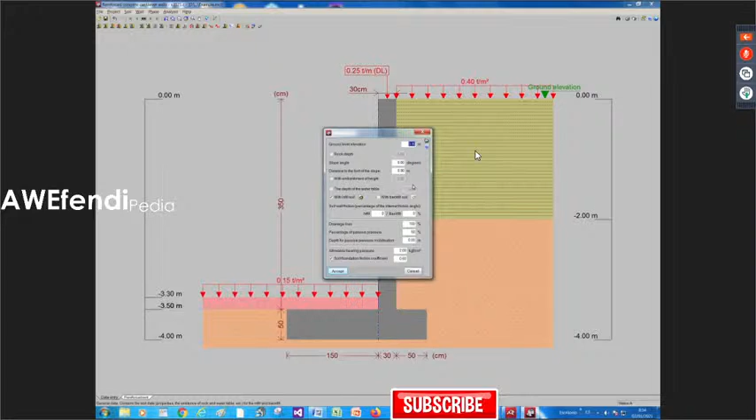Well, the type will permit us to change if we want fixed. Fixed means that we don't want to know anything about the foundation. We can choose strip footing, which is normally the option we use, or the capping beam to have the pile cap distributed with two parallel pile alignments. So we leave this default option, and the next thing to do is to go to the soil and fix the general data. We'll see it in the next job. I'm just making a general introduction of the program.

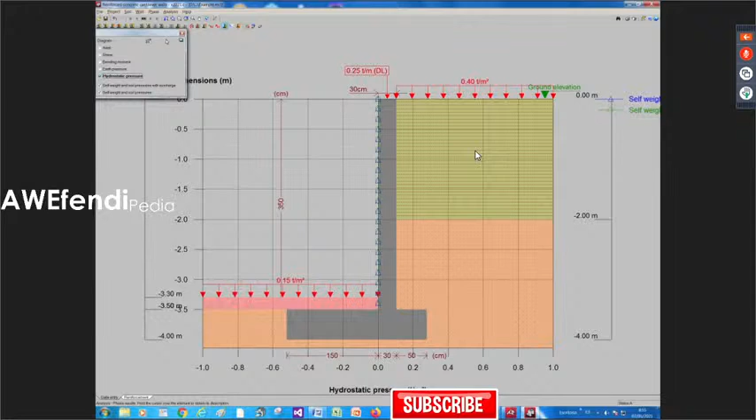And when we fix the soil, we can also edit different layers to fix parameters of the layers we have. We can go to the wall and edit the geometry, the thickness, the bottom thickness to make it variable. And we can create different phases where we change the way the soil acts. When this information is done, we can go directly to analyze and force the program to give us some results, like axial diagram, shear diagram, bending moment, earth pressure, hydrostatic, and we can see it in the windows.

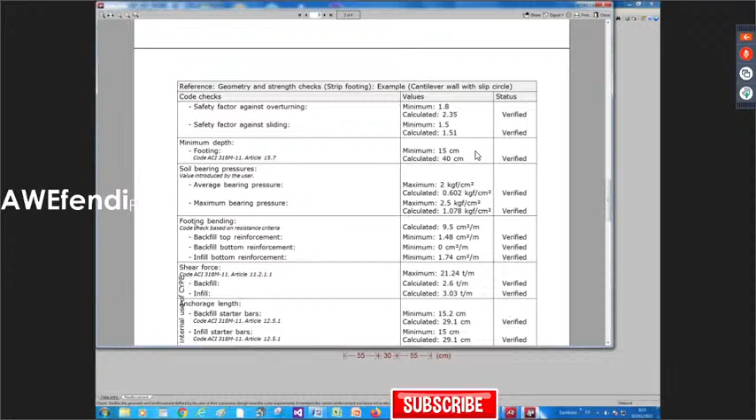But normally people go directly to design all. Design all means that the program will make the design of the reinforcement and also of the footing we need. When this is done, we have the possibility to make checks for the element, which will permit us to see the different verifications made. Basically, we have in the wall all these checks, but we have also in the footing the verification of slipping, of footing bending. We have the safety factor against overturning, sliding. This is very important for this type of wall, to know whether we have safety or not.

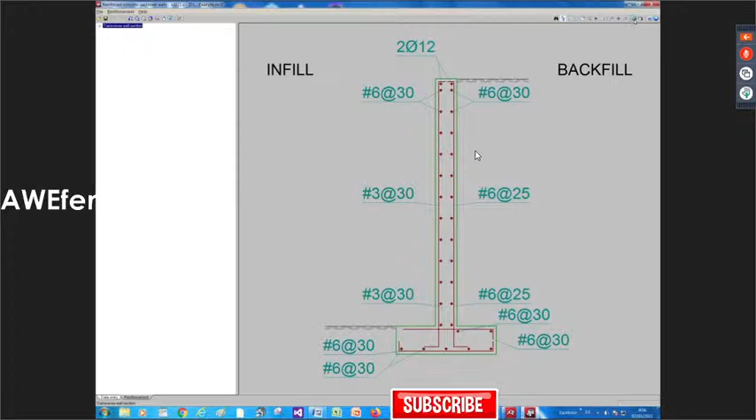So when the program gives the geometrical solution, we can go to the reinforcement and see the different reinforcement which was fixed. We have the possibility also to make additions, change the geometry and spacing, and verify the reinforcement fixed by the program. So this is a general introduction. Like other CYPE programs, we have the possibility to make general output for all the chapters we choose, and the output will be exported to the standard formats. In the plan creation, we also have the possibility to let the program generate drawings.

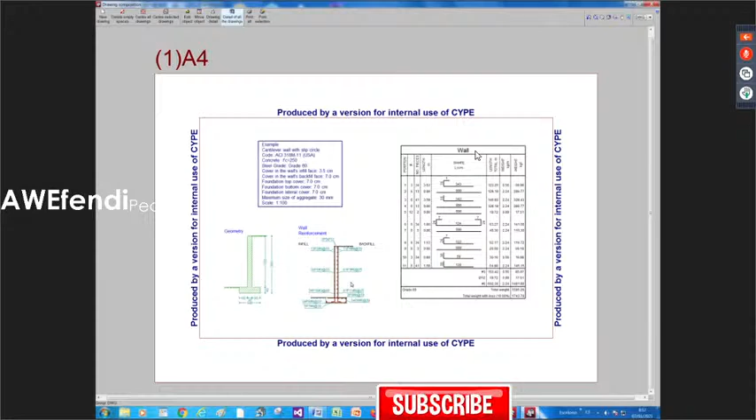So this is the drawing which was generated with a table showing the different types of reinforcement the program generated, and the way to cut the bar.

With this introduction, let me start a new job so we can go into more detail with the information of the case. So very simple: we have a data entry, a reinforcement. It's a simple cantilever wall where we'll have the possibility to change variables of the geometry of the wall.

The foundation will have the parameters of the soils, and also we can go to the project. We have the possibility to change the material we use, and the options the program uses to make the verification, like the safety factor of sliding and overturning. We can adapt the special case we want to make. This is some option to permit the program to take different ways of making the reinforcement, without continuity in bar spacing.

Let's start a new job.

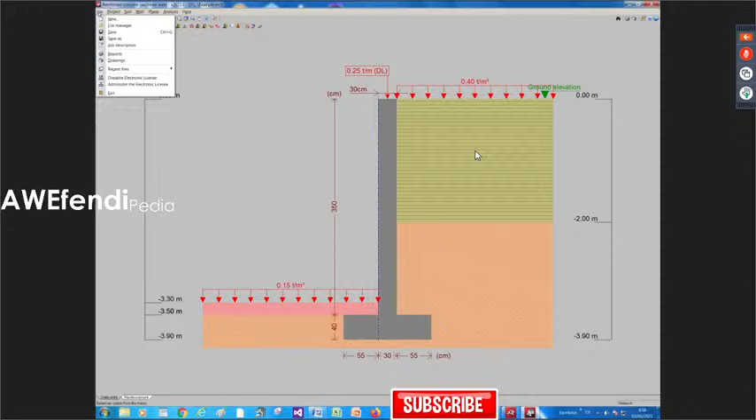Normally we can start from zero, or we can use the assistant. If we are starting for the first time, I recommend you use this option. It will permit you to have more aid while putting in information. So we have this assistant, which is very simple.

You see that we can control the geometry, the soil, and the load. When starting with the geometry, we have to fix information like the height. We want to resolve the problem we have in mind, so we can leave this value or we can change it. No problem, that depends on you.

You can, if the wall is high, maybe you want to optimize the section and make it variable, and you can choose this different option.

The footing we will handle with tools and helps. We'll put this option, so we have tools and help in the footing of the foundation we are making.

So we go to the next item, which is the soil, and we can choose in the backfill one of the proposals the program gives us. When we choose the type, it can be gravel, but no problem - if you have specific geotechnical information, you can choose. You can choose in these windows something similar, and later you can change parameters.

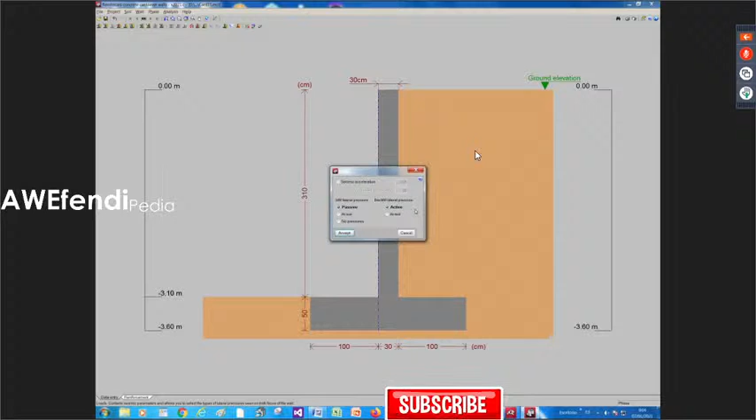In the case we have some type of element to avoid the movement of the upper part of the wall, we change it to at rest. For the infill lateral pressure on this side and the left side, to prevent the sliding of the wall, we use passive pressure.

So normally the default option is the correct value to choose. If we have seismic forces, we can permit the program to use the Mononobe-Okabe equation to generate these forces, taking into account the acceleration we input and the percentage of this.

We have an error at this point in the live load. This word is not correct - it should be surcharge, not live load. Live load is considered with seismic.

We will use 18% of the charge to generate the horizontal seismic force. But I have to note this word, so the team will make a correction in the English version.

We also have in the reinforcement table the possibility to see the types of reinforcement available, and the program will use it to make the design. If we want to add another combination, we can do it, but I think this is enough for the typical job we are doing.

With this option, normally we don't need to come back to this in any job. When we know what the program does, it's sufficient. There is some message - no, this is okay, so we go next to the next menu.

We go to soil. In the general data, we can see some parameters. The ground level elevation we already talked about in the general windows - we will not change it because we want the top part of the wall to match the top part of the ground.

We can, in case we want to release the pressure, if we have rock at some depth, indicate at what height we have it. This is not often the case, and we can have rock like this, but this is not common. So let's go back to general data, so we can decrease the pressure according to the real situation we have in the job.

So we have the slope angle, we can have a sloped angle in degrees, and we have a distance of 1 meter - you see what we change. This will permit us in some cases to make an accurate definition of the soil. So we remove it to 0.

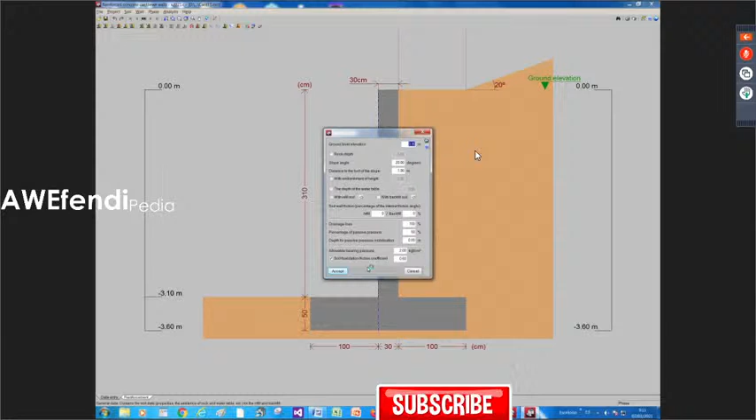This the engineer decides. We also have the possibility to change the allowable bearing pressure if we don't agree with this value or want to change it. And if we want to make the verification of sliding, this button must be checked. You see that the program helps us and gives aid in any window, so we can know how this parameter can affect the calculation we make. This is very important. We also have general aid at this point. If we click this button, we can get special aid on all the parameters we need, so this is the way the user can have specific information about the parameter being changed.

So let's come back here, but I want to go to the soil general data. I want to remove this value. So I accept, okay. When we go to the soil, we have the possibility to create a new layer or edit a layer which is already in place.

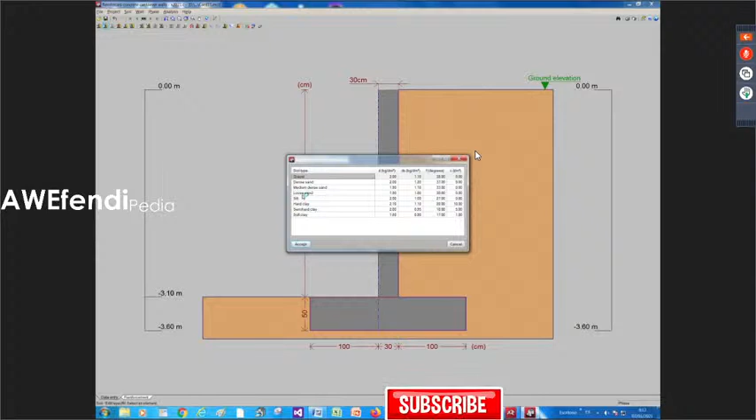You remember at the start, when we use the assistant program, it forces us to use some generic type of soil. But if we have a specific soil, maybe we want to change the submerged unit weight, or the internal frictional angle, or make it different. This parameter is very important to generate the pressure. Even though the program gives us some standard value, it's very important to input the value we have in the geotechnical report.

That's why when we go to soil edit layer, we can fix the parameters properly. If instead of 30 we have 22, we have to input that value. If we have some cohesion, we have to introduce it to help us; if we don't have cohesion, we don't put it, of course. So we see that it will all work perfectly. We also have parameters to copy a layer, edit a layer, or change the hatching, but this is simply for changing the way the soil is hatched, which is relatively unimportant.

We can go to the phases to change something during the life of the wall. Maybe we have some variable forces, so we can make the load incremental. We can add a vertical load at the top. Maybe we have 1 ton in the dead load, and we put some value in the live load. I'll remove it and put vertical load as 2 tons, with no increased load. This will be sufficient. You see the program will show this load in the window.

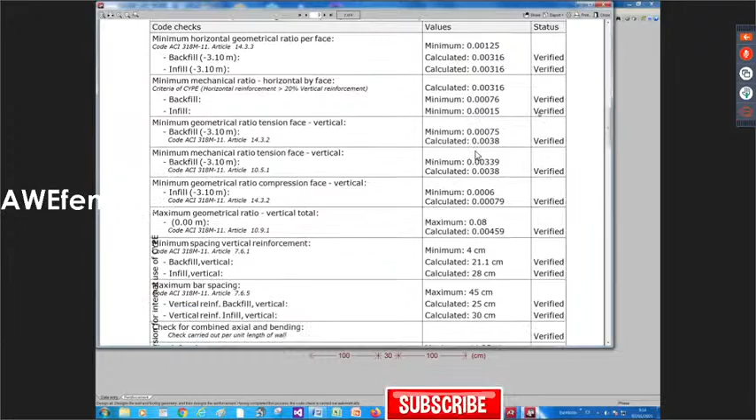So now we go to the analysis. We already see and force the design of the wall. Let's see some checks. We go down to the point of verification to see what it shows.

According to the code, we need to have a cover which is a minimum of 7.5 centimeters to verify. So the way to verify this is if we come back to the project and go to the material and change the minimum value.

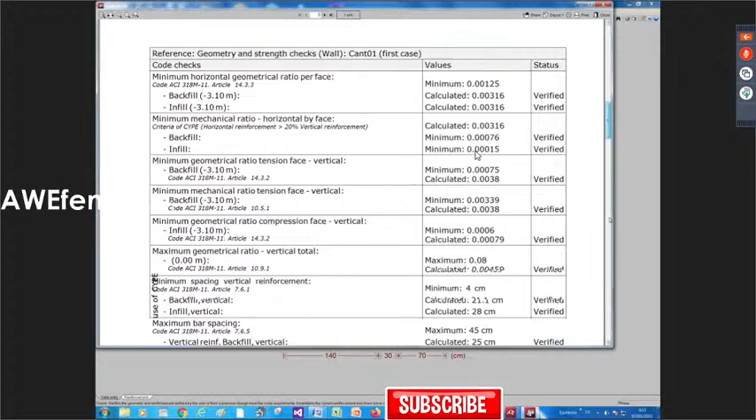Let's see what happened. The cover of the lateral—what I'm talking about is the lateral cover of the footing. Project, material, lateral—this is my mistake.

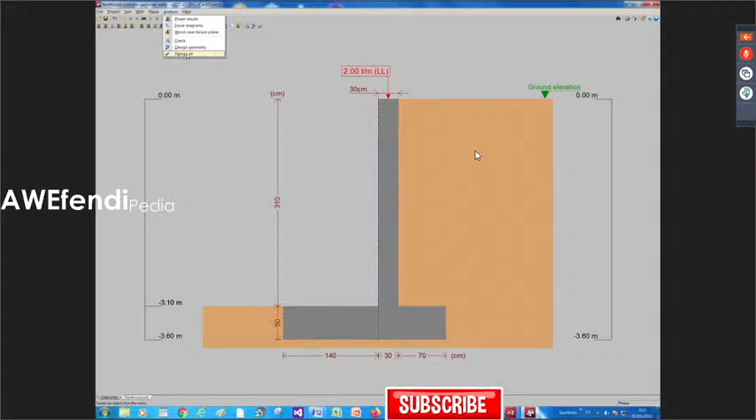If we want to verify it, or if we take a different decision as the engineer, we can go on with it. I make the changes and immediately the program takes it into account and verifies the condition. So, well, this is the solution.

If we need to change some geometry, we can do it with edit-span foundation. We go and change the geometry—if this is 140, we change it to 135, like this. The program accepts this modification, and we can force the program to design the geometry. So the program, without changing the geometry, tries to design it and give the reinforcement according to the new values. If we have some problem of overturning or sliding, the program will advise us.

So let's check—we see that this solution is correct. So the next step is to go to the reinforcement to check if we agree with it. Some people need this reinforcement to continue like this, but in this case it's not necessary. So if we want to force the program to do it, let's go and change the footing.

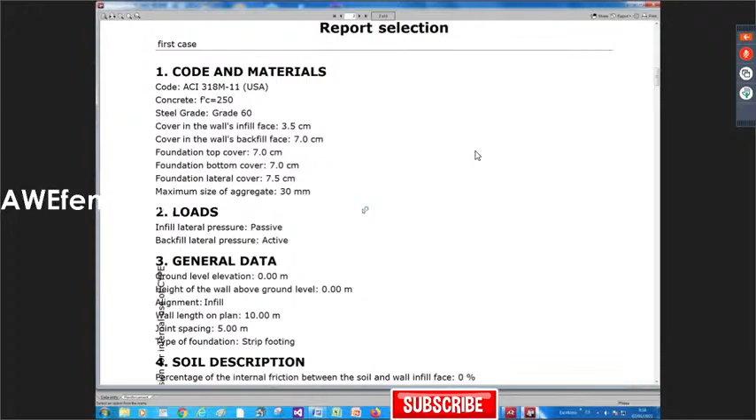And now we can finish by making, of course, the report. It will show us the case selected, the load input, the general data, the soil description, the geometry, and the phase diagram. We consider numerical values of axial, shear, bending, earth pressure, hydrostatic. In this case, we don't have it.

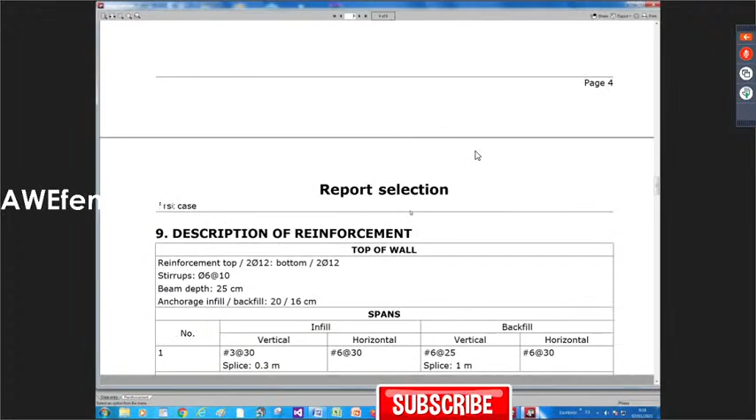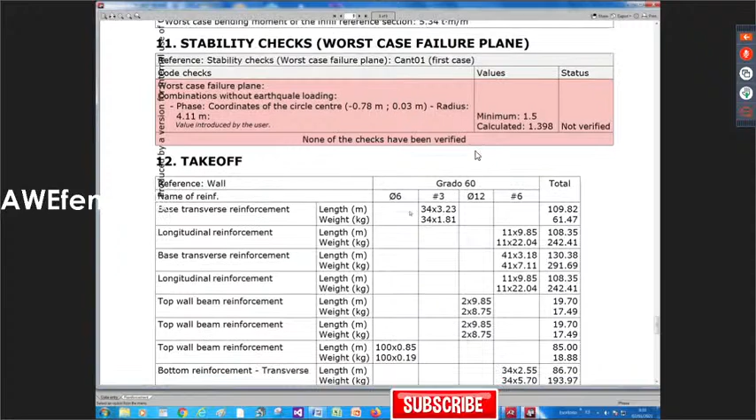That's why the combination makes the design report selection, description of reinforcement according to the different element report. The checks made for the two elements, the vertical element and the foundation element. And this is the stability check, which is a bonus the program gives us.

In this case, if I come back to this point, I choose analyze and we choose worst case failure plane. It is an additional verification the program gives us. You see, the program in this case tries to analyze choosing the center and a curve for the slicing, and this is the poorest point. This point gives us a coefficient of security of 1.4, which is less than 1.5. That means that it doesn't work.

Normally, this is a theoretical computation. So maybe you can say that this wall doesn't work like this, because we don't have the factor of security higher than 1.5. How can we arrange that? We have to think that the ground is not homogeneous. It's irregular. If we have some stone there, this factor will be higher.

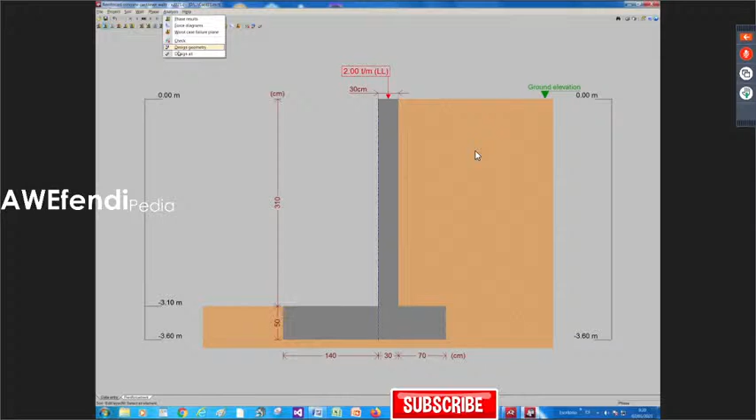Or we can also try, normally we don't take into account the cohesion in the soil. In reality, we maybe have some cohesion to permit us to pass this verification. Let's try to put 1 ton. And we go back to analysis, worst check. See, with only that change, we increase the factor to 2.36. That means that it works.

So take care about this verification because it's a theoretical value. That's why the program makes it separately. It doesn't make it with the general check, it makes it apart, so the engineer can understand and take a correct decision to verify it.

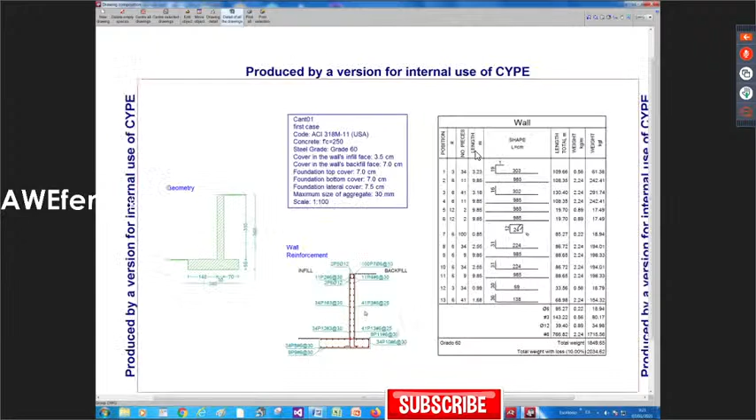So, to continue, we force the creation of the plan and add, of course, the reinforcement. We can add the title bar. So we see the geometry at this point, the reinforcement at this point, the table for the measurement at this point. That's all for this program.

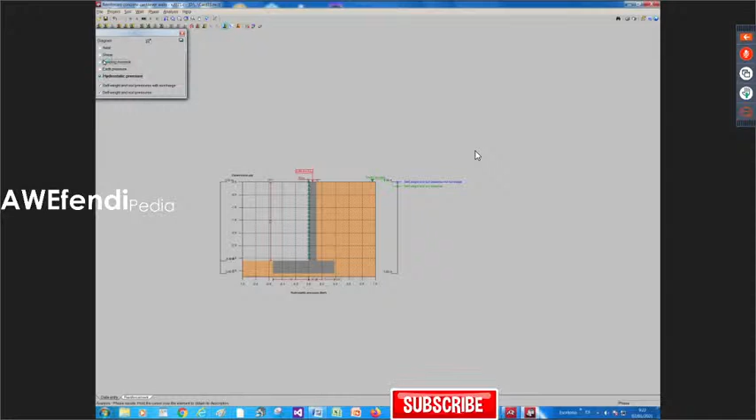How do you make the soil layers? Yes, can you repeat? How do you make the soil layers if you have 2 or 3 layers of soil? Yes. Let's come back. See, you just go to soil, new layer. You give a name, second layer. When the name is given, you give the depth, 1 meter, and change the parameters. You have the second layer.

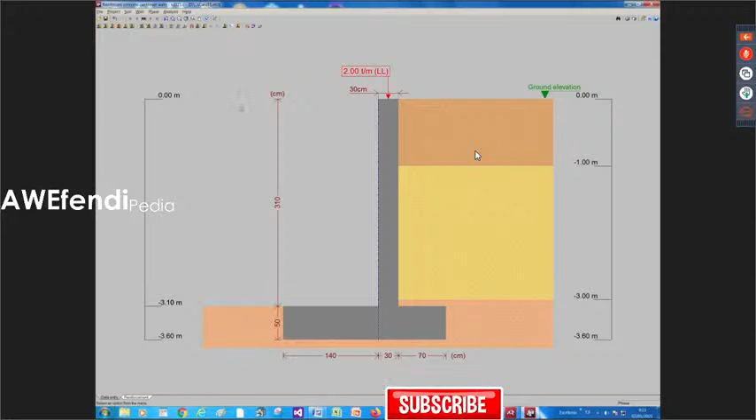If you want another soil new layer, in this case third layer, depth 3 meters, and so on. You can create all the different layers you want. This is not a problem. Normally within 3 meters it is difficult to have changes of soil.

Just now you showed the reinforcement, right? In the reinforcement, it says number 3. What is the diameter of the steel? How do we see the diameter of the steel? In the reinforcement, at this point? This is the number 3. What does it mean? This is because I chose the ASTM representation.

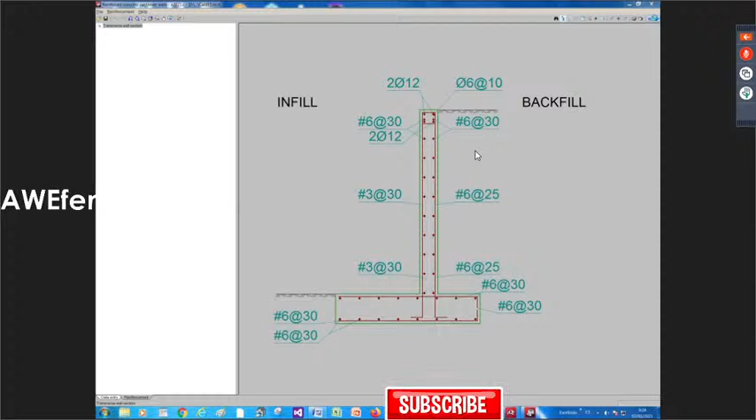If we choose a different representation, this goes according to the ASTM unit representation of reinforcement. Let's go back to this. Normally, what we use over here is like D16, which means diameter 16. Yes, because it goes. Let's see this.

I have in CYPE, because now we are working in house, the equivalent of this diameter. But normally I don't work with this type of design. So you want to see it like that, no? Because it depends. Does that mean like 10 millimeter at 25 centimeter distance? Is that right? Yeah, this is the displacement and the diameter.

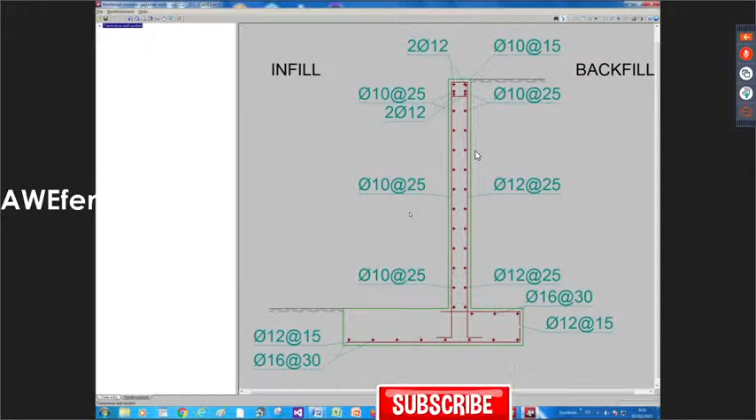And when we change the ACI, we have English nomenclature of diameter. If we have the equivalent table, we can choose it. Normally, when we use this code, we also manage with people who know how to use this type of nomenclature. This is the way we think it. Okay. Well, in this case, we close this.

And we go to the Box Culvert. The Box Culvert is a specific program which permits us to, let's see, it's a program which is prepared to make analysis of structures of small bridges, concrete bridges with a span normally no more than 12 meters, 30 meters, beyond which we will need another technology of pre-stress. So it's very important to understand which type of element we'll manage.

So before I start to show the program, I will give you a general view. Let me show you some images I prepared. This one. Even though this is in French, no problem. So this is a general way.

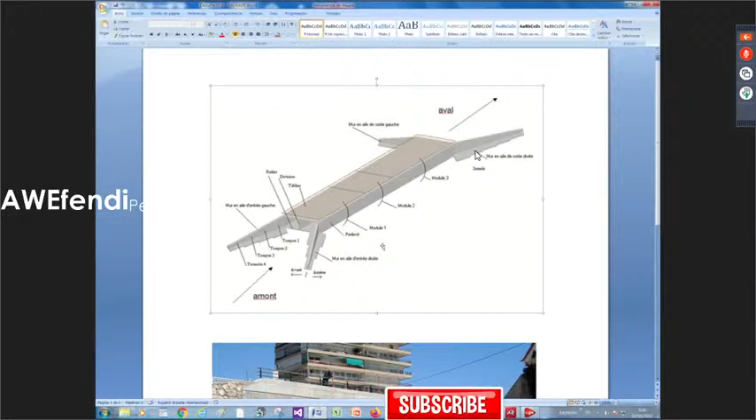And when you make wings, you can optimize the wings by creating different types of span, and the program will take it as rectangular elements to approximate the variation. This is the general way to understand what we call a box culvert. This forces me to ask a question. The image we are looking at, can we make it with the program Box Culvert? The response is no. Why no? Because we verify that we have walls and a flat slab, but we don't have a mat foundation.

So this situation makes us think that to resolve this, we have to use CYPECAD. With CYPECAD, we are not forced to introduce a mat foundation. We can have a foundation for the different walls like this. So that's why I put this image, for the user to know how to identify which problem can be resolved with the box culvert

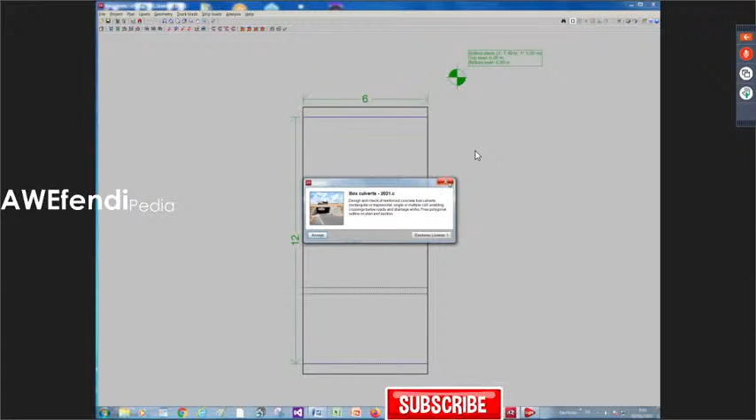This is a typical solution we can give with this program. Now let's see how the program is formatted. In the upper part we have the menu to go to the typical file of CYPE, where we have the project to manage material, general data, option, reinforcement table, view. We have plan to generate the geometry. We'll see how to use it.

Also to manage the different levels, the geometry, material geometry, how to introduce truck load, strip load, and to make the analysis. The center module will be analyzed as a finite element, and the wings will be analyzed, of course, as cantilevers. This is the way we make it.

At the bottom part we have edit, force, reinforcement. With edit, we make the addition of this geometry. This is a simple example; we have the possibility to load the examples CYPE has. When we go to the project, we see the 3D view. In this case, we don't need wings, so there are no wings.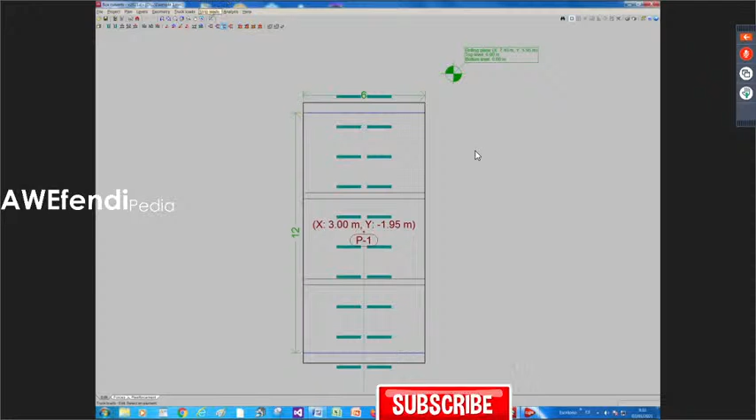When we make the analysis, we can go to see the loads we have. If we go to the truck load, we can see the truck load being generated, to transmit the print of the lorry in the module, so we can have different behavior. We also have the strip load being introduced. So we make the analysis, design all; we come back later when we do a particular case.

We also have the verification being made, and we can go to the force tab to see with finite elements the different load cases. In this case, we can see the truck at position 1 to see where the bending moments are greater in the windows. And we can go, of course, to the reinforcement.

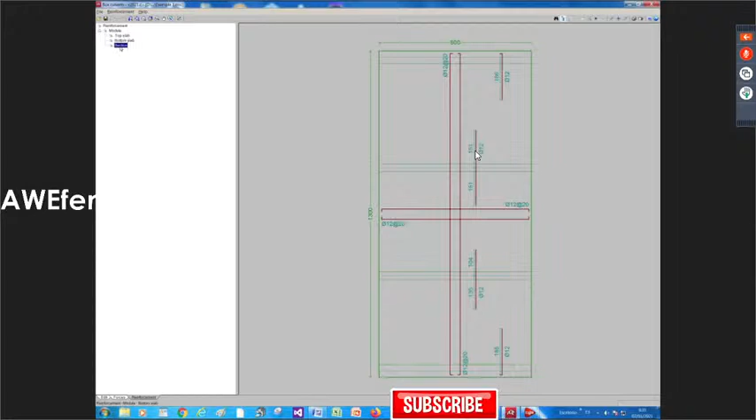In this case, we have a lot of elements, so we can go to the hierarchical window to go to the module, and the module is composed of the top slab, the bottom slab, in this case the mat foundation, and a section where, in the same way we already talked about, we can modify the reinforcement to verify. And finally, we can output by making a report and, of course, plans. So this will be the general way to work with the program.

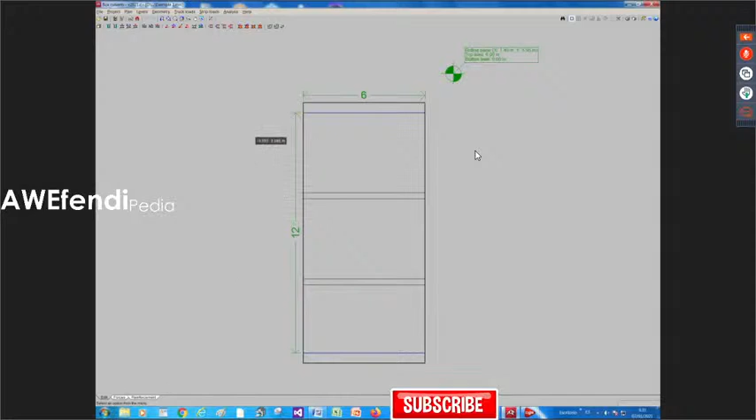With this simple introduction, we will start a new job. Remember, the code will be changed at this point, in the same manner we already talked about for the cantilever program. So let's start a new job. In this case also, we have an assistant to help the user, the assistant for straight culvert, which permits us to change the geometry.

In this case, we can leave the proposed geometry, internal height 4.5, the clear span we put 6 meters, the length of the axis is very clear, and the geometry information they ask us. We go to the wing wall. Optionally the program can generate the wings. If we don't want wings generated, we simply remove this. But in this case, we'll leave it.

The orientation of the wings will be according to this option. We can make it extended or parallel. Normally, when it is extended with 0 degrees, we have it like this. If we want to open it about this point, we'll put maybe 15 degrees. If not, it will be parallel. So this is the generation of the wing walls, and we continue.

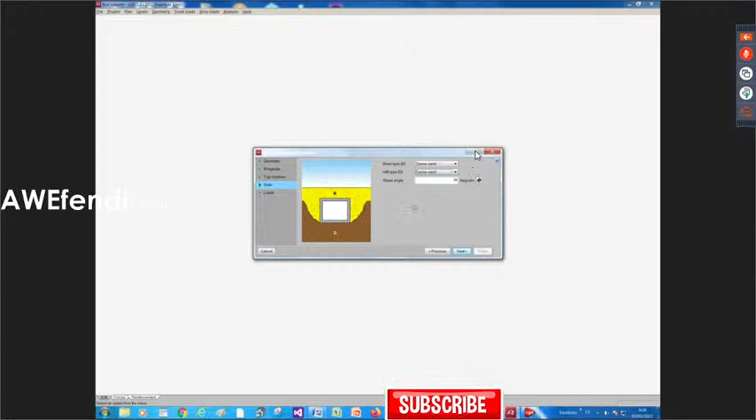So in the case of the base soil, we choose what we need. Later, we can also change the specific parameter. And in the case of infill type, we choose the one we need. The slope angle is the way the program will make the distribution or the transfer of the load in the bottom. Normally this value is acceptable, and we go to the load generation.

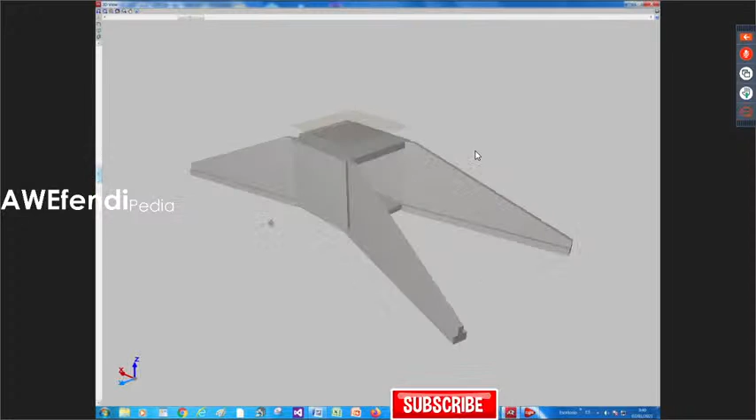With this information, we avoid entering the plan and starting to draw the lateral left wall and lateral right wall, because the program already does this design. So if we go to the project 3D, when you use the assistant, you don't need to draw it, because all the information you give permits the program to generate it.

You have the thickness of the space between the top of the slab and the road, the filling. The program shows you this information, all of it dimensioned. You have the indication of the top level, so you can see it at this point. And you can verify which type of truck load the program generates according to the height and the width of the module. This is the print of the type of truck we have and the load.

So we have 3 positions, you see: one in the center and the left. The different positions permit the program to take appropriate forces in the wall, in the span, in the slab, or in the other wall. In this condition this is correct. If we have 2 traffic ways, we'll have one in this direction and one in the other direction to repeat this configuration. Very important when we are talking about the truck load.

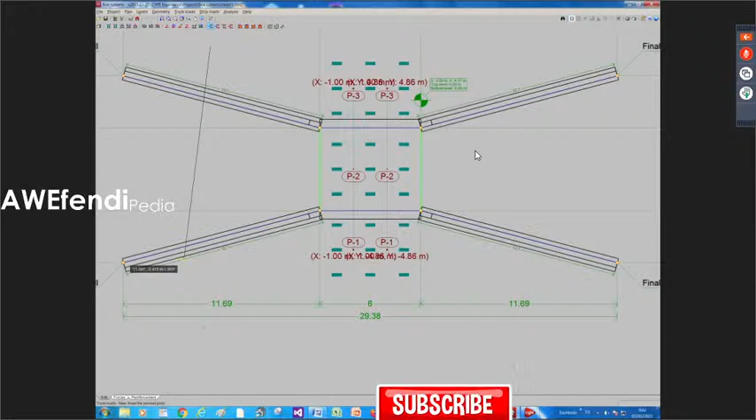When we want to make another truck load, you see that I can choose a point. This makes no sense because we have to put the truck load on top of the module, but no problem. That will let us see the direction of the truck load, and we decide how many positions we have. I choose 2, and we can take a proposed printed truck, or we can go to the editor and generate the proper one we have.

This is maybe the most important part of the program, because it permits the user to generate the print of a special load, and when they change the position of any print and the load, they can put it in the library to use it later. This is the option: I can import from library, export to library. I will import predefined data.

Let us go to capacity truck. This one, you see, is different. So I will use this one. I have 2 positions, and the program will take it into account. But I just show this to show more possibilities. I will delete this and leave only the 2 that were generated for our case.

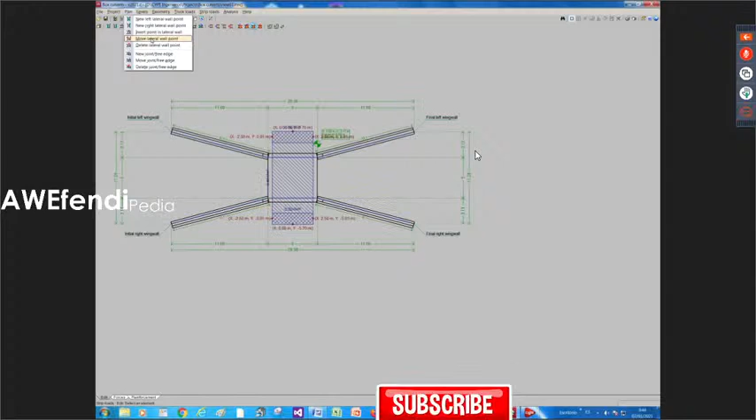We can see other additional loads we can put, or see what the assistant does for us. This is the dead load, the live load, put in the place we need to take into account for the design of the elements of the module. So this is the way we verify what the assistant does for us, and we can change it. If we don't agree with this geometry, we can come with the plan menu and move a lateral point. We can take this point and move it if we have a template. If we have time later, we'll try to use a template to draw another case. Okay. So all information can be changed.

If we come back to the project and go to the material, we see that it's similar to the cantilever wall. The parameters of concrete, steel grade, exposure, all this can be changed. If we come back to the project and go to general data, we have different parameters which will be very important for the calculation. We can start with the subgrade modulus. We say that the bottom is a mat foundation. So when we choose a standard type of soil, the program transfers this information.

But if we have special information, we can change it by changing this point. We can also, in the field, have the apparent unit weight to generate the load on the lateral wall. This will be the parameter to change it. This is a parameter for the base soil, and this will be the parameter for the filling.

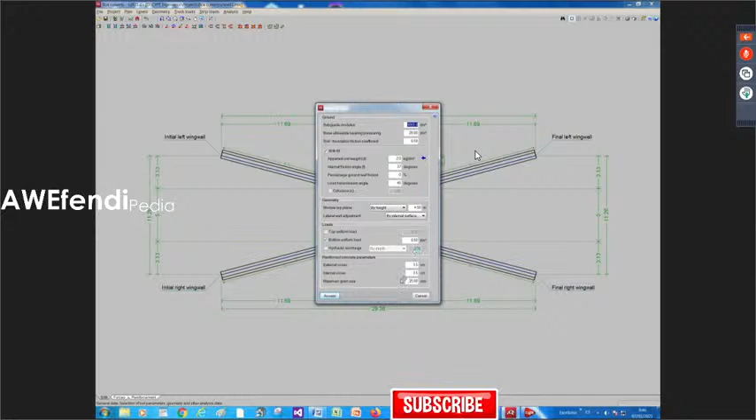So the way to manage the geometry is by height; we already know the level where we will have the road, and the lateral wall adjustment will be the internal surface. So this is another way to generate load for the standard element. In this case, the bottom uniform load, and the program shows the value to be changed, and of course we have the cover for each element.

If we come back to the project and go to Options, we have the possibility to change some options for the design and evaluation of the reinforcement. In the normal case, the program tries to give a general base reinforcement, and we have punctual reinforcement. At some point, we have to cover 100%. This is the normal way. It's similar to what we do in the mat foundation in CYPECAD.

So with this parameter, we can force the program to design all, and the program makes the determination of forces. When some check doesn't work, we'll see what's wrong. We have a problem relative to maximum shear. The program doesn't give shear reinforcement on the wall, because in this type of bridge it's very uncommon to make shear reinforcement. So the program makes the verification without shear reinforcement. We have a verification of 96%.

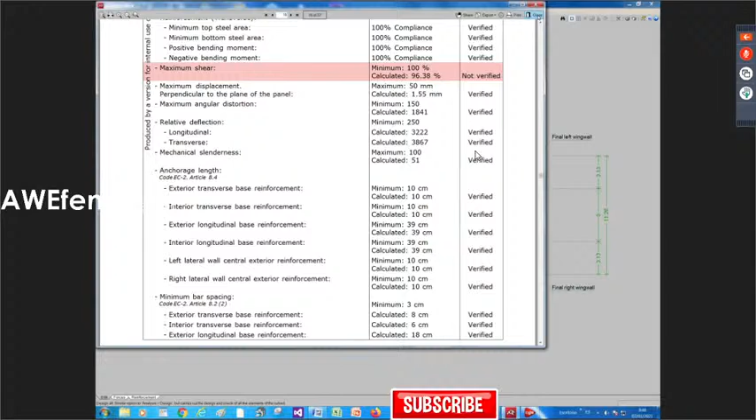So you see the program designs the footing, increasing like this, so we don't need to make it uniform. And if we go to the reinforcement, in this case we have more elements: we have a module, a left initial wing. So we have 4 wings. Going from left to right, we meet the right initial wing, the right final wing, the left final wing and the left initial wing.

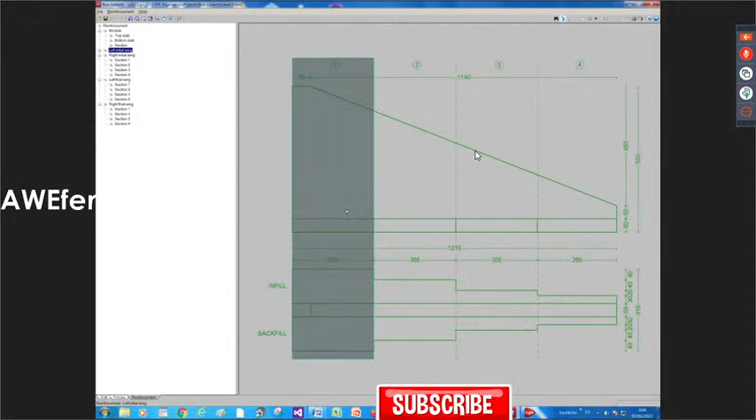That means that with this hierarchical organization, we can go directly to the element we need. If we go to the module, we have information on the top, the bottom, and the section. If we go to the left initial wing and choose a section, we have something similar to the cantilever wall, to change and to see. Of course, when we make verification, in this case, everything is okay.

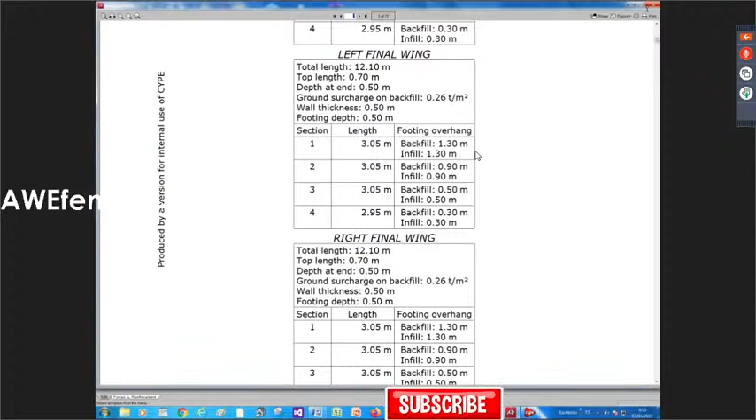We can generate the report, where we have all information about the geometry, loads, forces, the typical information, and the possibility to export. And we can come back to the plan generation. Okay. So we have the geometry, the section of the module, and the reinforcement schedule for the different sections of the wings, which vary for execution.

This is the example. Let's try another case, but this time, instead of using the assistant, we'll do it directly. So let me go to File, New. Maybe we use CAD input. In this case, I will use none. If we choose none, we'll be forced to go to the material generation and change some parameters like the ground information, but this is not very important in this case.

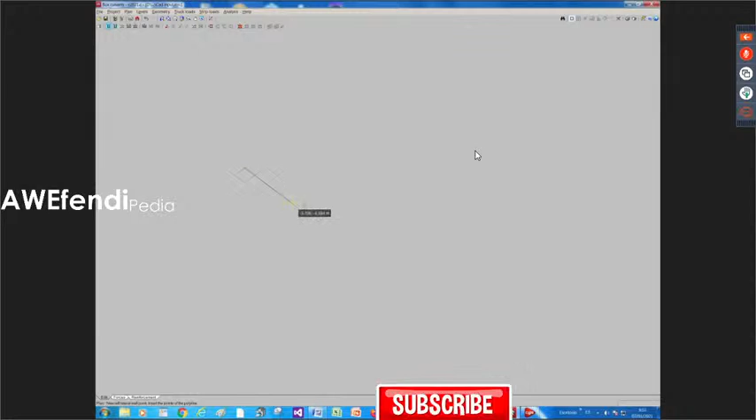So when I start this, 1, 2, 3, right click, finish.

If I come back with new right lateral wall, I can start like this and finish like this. If I come back with plan, I have the possibility to create a new join face.

So if I join this point with this, and a new join, and this one with this information, the program can generate the geometry. Maybe this is what makes it very quick. So we have to consider this, it's very important. Now we know how the program works.

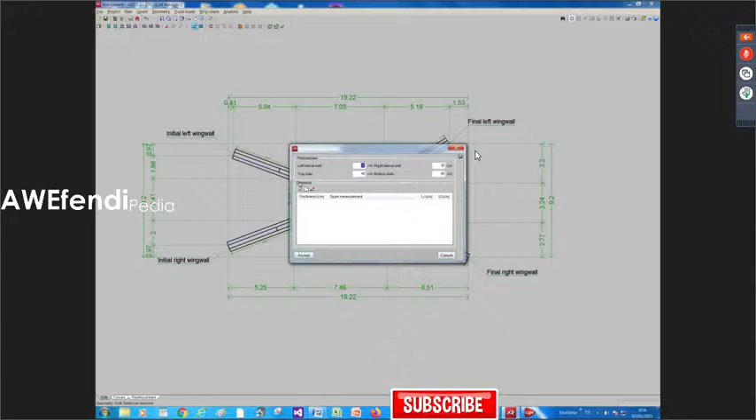Permit me to delete all these elements. There are some elements like this. We can add a new join, this in the geometry, a division. We can add this and create a new division. In certain cases we would make this to reduce the span. This is a small demonstration of how the geometry works fast.

Let's come back to the plan and delete all the elements we introduced. Plan, delete lateral walls. We are at the starting point. In this case, we want to use a template. This will be the usual case when it is complex, but also when it's simple.

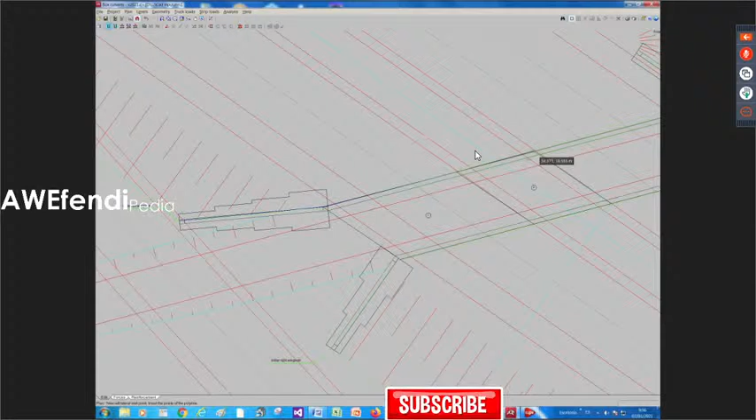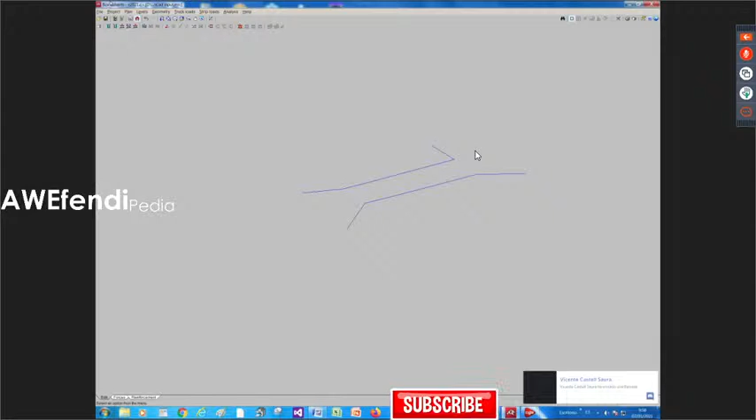Antonio, are you talking or not? There is no voice. Antonio? Antonio, no voice. Cannot hear you, Antonio. Antonio, there is no voice of you. Antonio? Antonio, there is no voice of you.

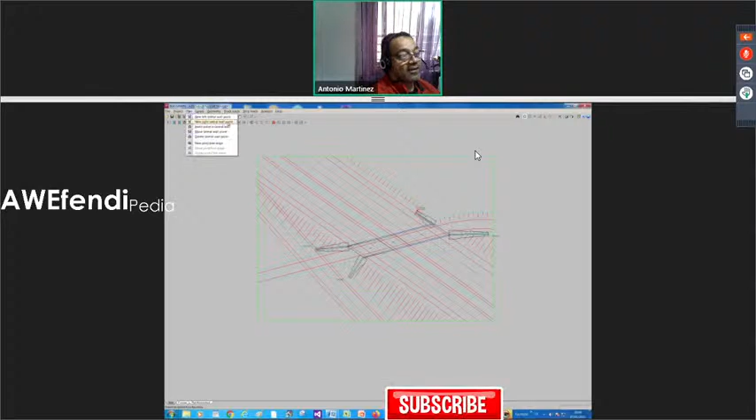This is the way to make the introduction by using a template. I use a template to draw the left and the right lateral wall. When it is drawn like this, I will try to not see the template, so we see the line of the lateral wall.

Now I continue with the plan. I make a new join and only have to connect the points where I want to make a module. In this case, this is the first module. The program detects it, this is the second module, and this is the third. If I join this, the program thinks it's a module also, but this depends if you have deleted the join point.

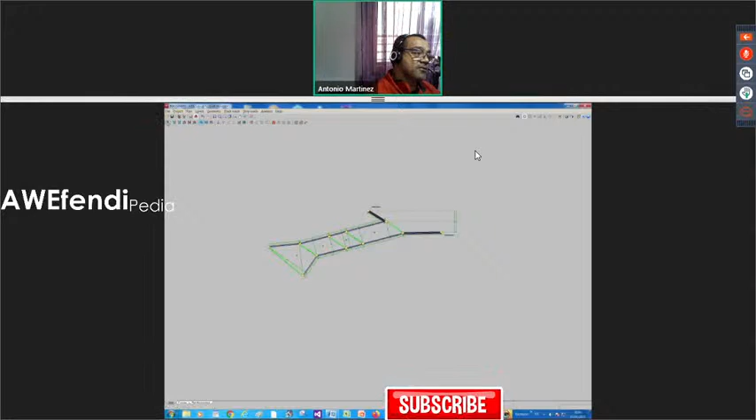If we force the 3D view, we have some incompatibilities. So let me delete the join. Delete the join. Maybe I didn't draw it, so I deleted it. We have some incompatibility. Delete lateral join. Delete join, a moment, let me see. It's very important, I will use this to delete the lateral wall to make it.

So this is my template. It's very important to know that if we use this, the orientation will determine the entry into the module, and this will be the output. So when we go from left to right, all the walls on the right hand side will be made with this option. Let me choose new right lateral wall.

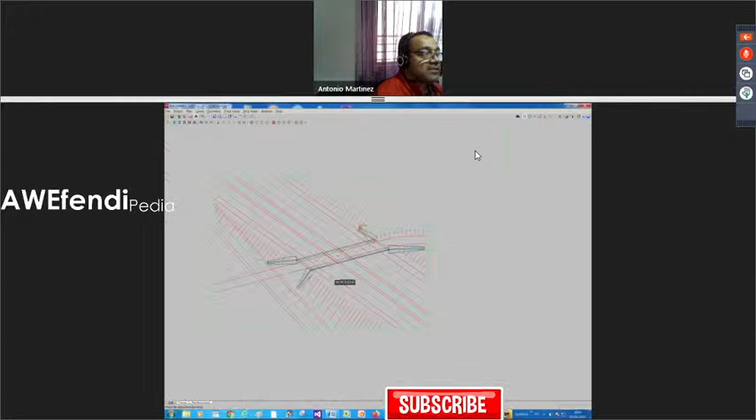So I will try it again. I will not make it very accurately, just to go fast. This is the right, I go to the plan and the left. Let's see. We have 3 modules in this case.

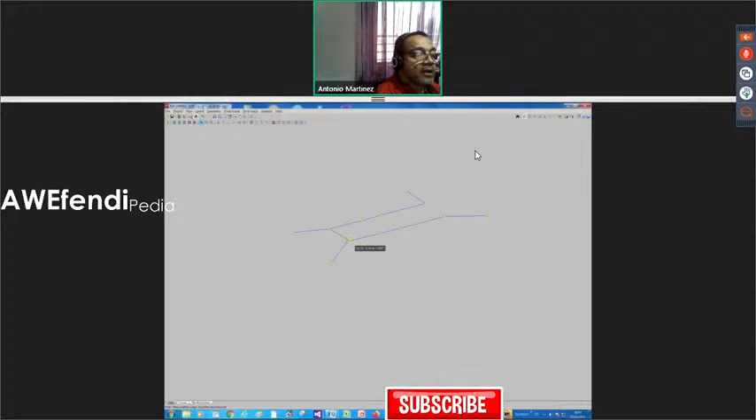Okay, let's try to create a join with the plan, new join. Permit me to make it not visible so you can follow me. I join at the point where I will have a new module. Let's see. I have some incompatibility. Oh, this message is very bizarre.

I start there, initial right wing, initial left wing. Let me try to invert it. If it's not possible, I will load the default job. Delete join.

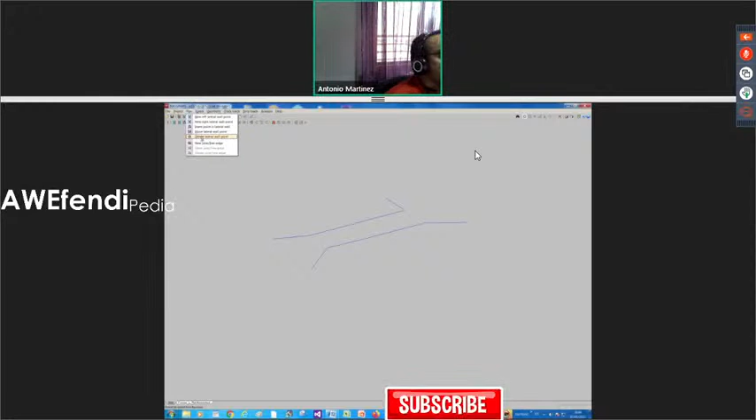Plan, delete lateral wall. I will try to invert the configuration. Load. I'll try to put the left and the right as they are, to see what happens. It's not normal, this.

Capture, capture, capture, capture, capture, capture, and now we go to the right.

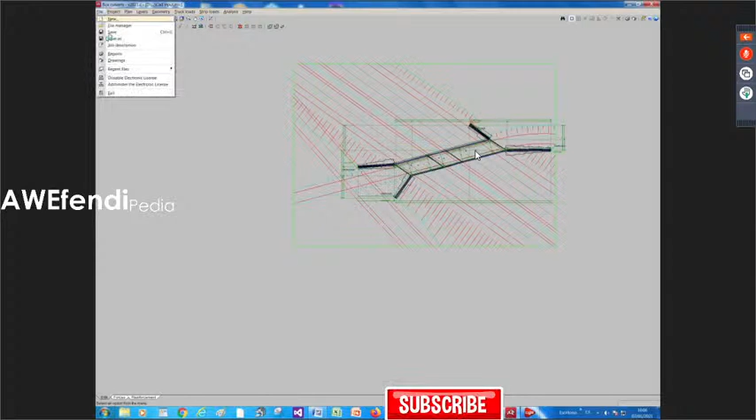Our new join. Something is bizarre. Well, in this case, to know, I will try. I will see it later. I want to.

The solution is to make this input. When we see it in the 3D, we see how we generate it. So let me close this and see the 3D view.

Now I will hide the DXF and we remain with the information we need. First module, second module, third module. And we can verify, in this case, the differences.

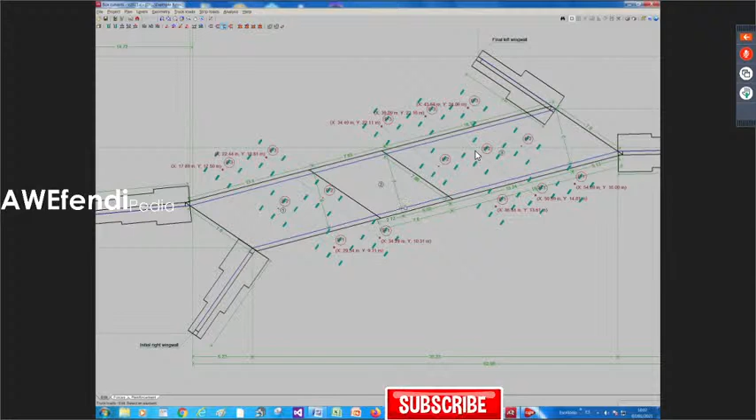In this module, we don't have the traffic, so we only have the traffic here. That's why we have this print of the traffic in a different position, like this, following the design of the road. This is a road, this is a middle module, we don't have traffic, and this permits us to make the connection.

And the second one, with this configuration, we also have the possibility to control the strip load we add at the point we have.

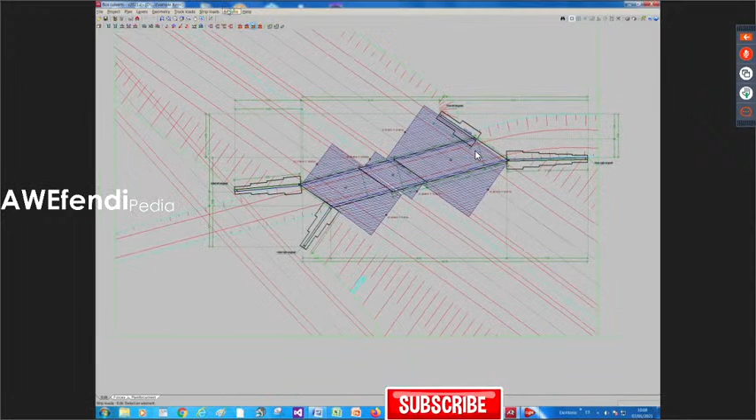We can introduce it when this is made. Of course, we make the design of all, and we have the configuration like the first case we make. In this case we have more modules.

So if we go to the forces and verify the different points, you see the second point, the third position. In this case, the traffic is out and we see the influence at this point. If we change it to the first position, it's at this other point, and if we change to the second, it's in the center. So it will be very important to permit the program to take all conditions of the

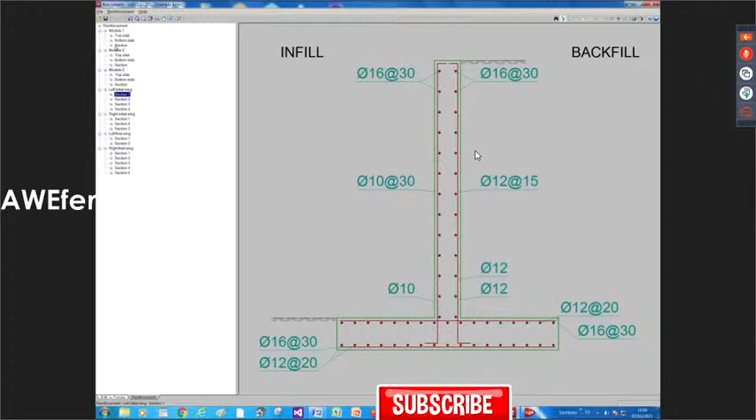truck load we are introducing. And the same way, if we go to reinforcement, we see the hierarchical organization of all. We can start with the module. This is the first module. This is the second module. And we have a third module, which is the bigger part. For any of these modules, we can see the top, the bottom slab reinforcement, or a section reinforcement.

If we go to the left initial wing, we have also the possibility to see the different partitions of the analyzed section, to make analysis, because this is the presentation of this module and the way they work. If you have questions, you can ask. For me, it's enough - the program was designed to be simple, it's not a complex program.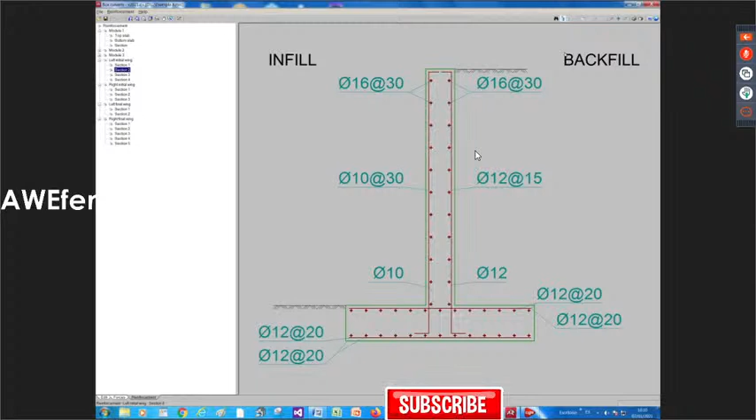When we are making cases, we are very different - we don't have mat foundation. We have to use CYPECAD and know how to use the scheme of the level, how to create different types of footing. But in this case, the box culvert is a specific type of structure which element we already talked about. We are forced to have a mat foundation, a slab at the top, and optionally we can have wings, and we may have divisions to reduce the span in order to make it suitable for the case we are analyzing.

Question: Is the method using finite elements? Yes, we use finite elements. That's why when I am seeing the result, we see it this way. So if you choose to see the discretization, you can see it.

According to these forces, if we make the output... This point program will also give, let's see, you see the result - the left wall gives you the numeration of points or nodes, so you can follow the result. Normally this is not usual, but you see that the base is finite element.

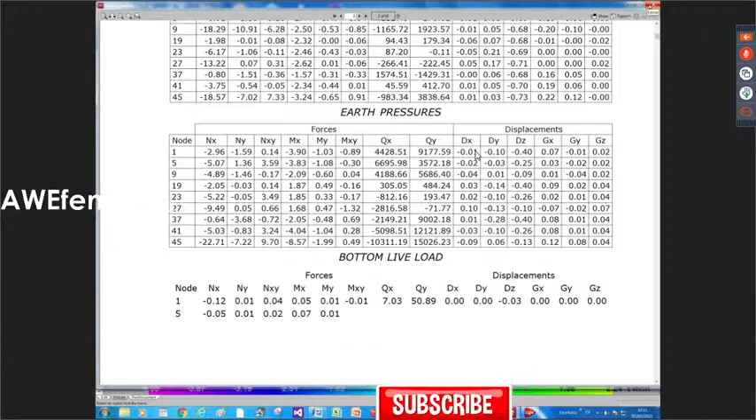In this case, I said at the start that the design of the module is being made by finite element, and the design of the wings is being made by a cantilever method. It's not finite element, it's a bar - we have a pressure, and we have bending moment, shear force, and we can design it. Understand this point? Yes, okay.

By the way, does it also take into account the moving load? For the moving load, no - in the case of the wings, we only take into account the infill load, because normally the wings have the purpose of avoiding the soil blocking the entry. You don't put load on top, so we only account for the infill load.

The traffic load will act on the module. We call module the center configuration of the slab, the mat foundation, and the external wall. So you are in the module itself.

Does the program take into account the moving load? Yes, yes, that's why I showed you this. You see, load case - I'm showing you the moving load. This is truck 1 in position 2. You see where it acts? In the center - so the design takes this into account.

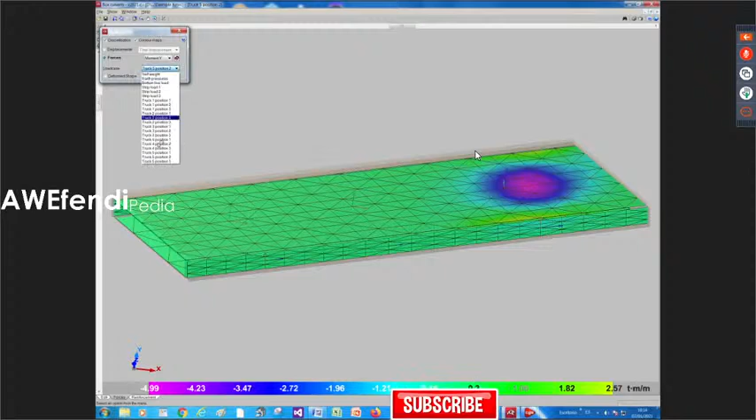So if we go to truck 3, we see this position. If we change it, we see how it acts at different points of the wall - the center of the slab. Of course, this is the task of this, to take into account in the module all elements of the module according to the position.

It seems that there are some questions here. Let me see. There is a question, no?

Are train loads supported? They are supported if you define it. Are train loads supported? You can let go. Yeah, close - we go to the edit windows.

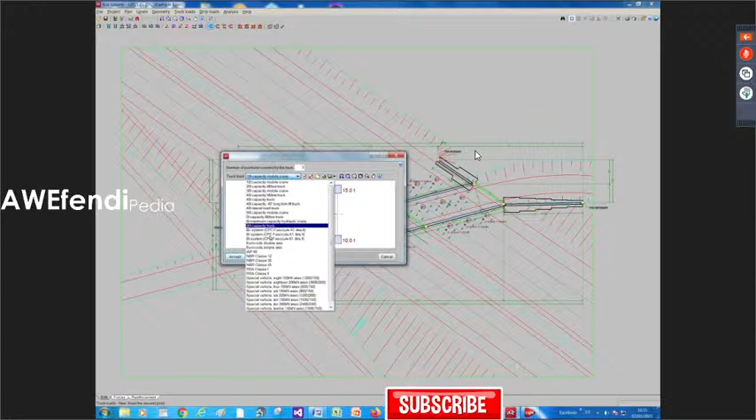In this case, I give truck load new because I want to introduce a new one. I select a start point, I select an end point. So the program gives me some possibilities. This one, this one, this one. If I don't have my case, I have the possibility to create it.

So you have to create, maybe with AutoCAD or with Excel, the print of the element where it will transmit the load. So you have the section, you draw it, and the load you want to transmit. When this information is made, you have something like this. And you decide the number of points to be used.

Let me change to a simple one like this. This is a truck. So you decide the position you want to distribute for the line you introduce. In this point, from here to here, I want 4 positions. If you want more, the more positions you put, the more accurate it is.

If you want to move the distribution line, the more you go out of the module, the less influence you will have on the element. So with this possibility, you can generate all types of truck load.

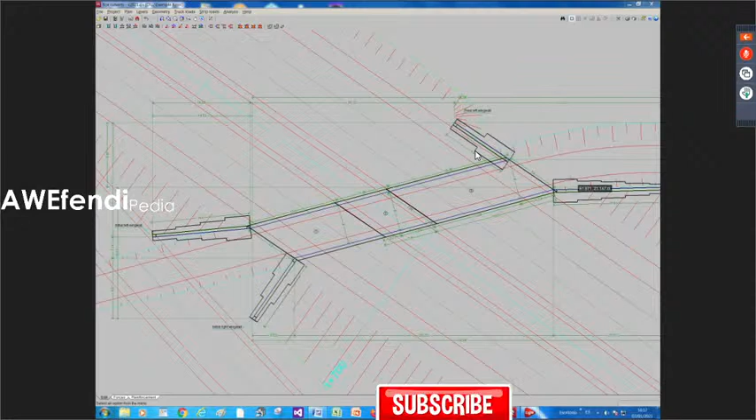Okay, let me see, it seems there was another question. Is that all the hatched area? The hatched area is the wheel load. Repeat. In the drawing just now for the traffic, the box, the square area that is with a color, is that the wheel load? Yes, the print.

The print of the element will transmit the load. In most codes, they try to make it an approximation of a rectangular element. That's why when we make the edition of this one I introduced, you see, this is the print of the element, which in this case is a mobile crane. This is a mobile crane.

So it's similar, the print of any of the tires. We can edit it to know it will be made in an area of 65 centimeters by 65 centimeters. And we have a load, a punctual load of 45 tons, which is being transmitted at this point. So this way, you can create any type of truck load or make an approximation of train load, or whatever you need.

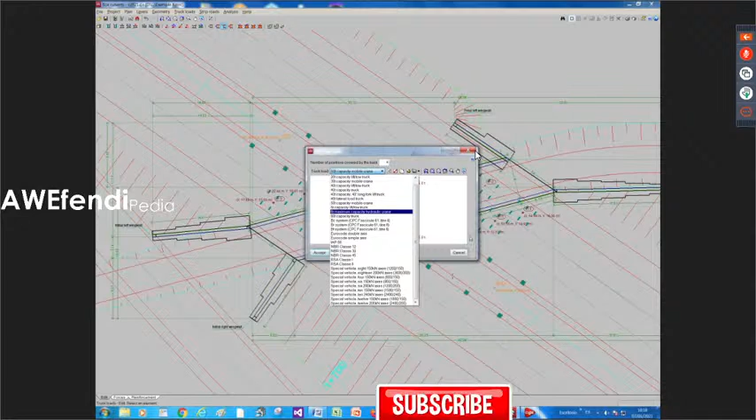The program has some types already introduced, but we don't have all the types. That's why we give this possibility to create and archive it in the library to reuse on another job. When you spend time to create a special truck load, you archive it in a file to reuse it in another job, of course.

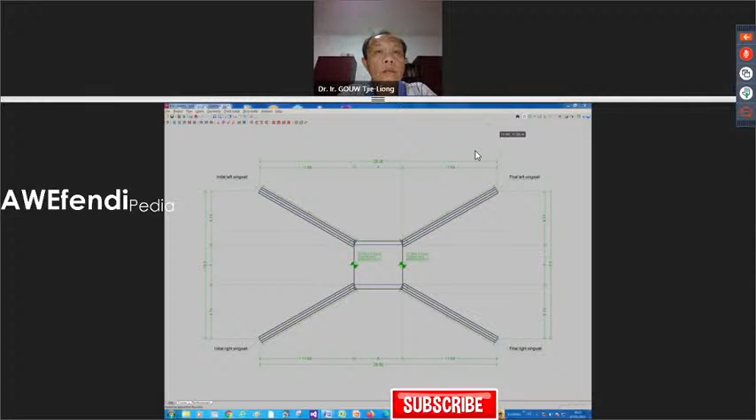It's a specific program for specific use, but we can only resolve the problem of box culverts, canopies, this way of use. Where we are looking at something different that we don't want as a mat foundation, it will not be a box culvert. That's why I tried to explain when I started the presentation. So these are all we have to remember to use the program.

It seems that you are finished, right? Yes, I'm finished, of course.